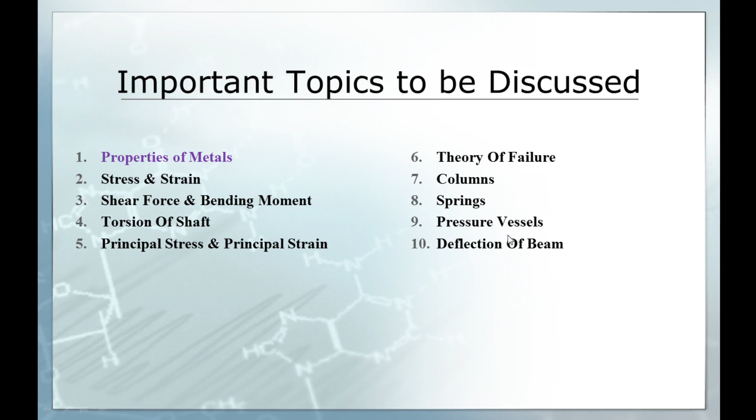In the metal properties, the first property is elasticity, which is very important to know for mechanical design engineers. The definition of elasticity is that it is the property by virtue of which a material deformed under the load is enabled to return to its original dimension when the load is removed.

When any specimen is loaded under tensile or compressive force, the material tends to deform to some extent within elastic limit, and when that load is removed, the specimen will regain its original shape and size.

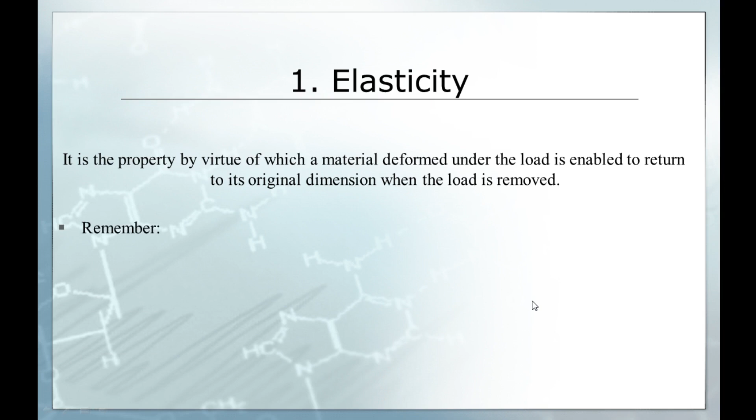There are few points to remember for elasticity. If a body regains completely its original shape, it is called a perfectly elastic body. Steel, aluminium, copper, concrete may be considered to be perfectly elastic within certain limit.

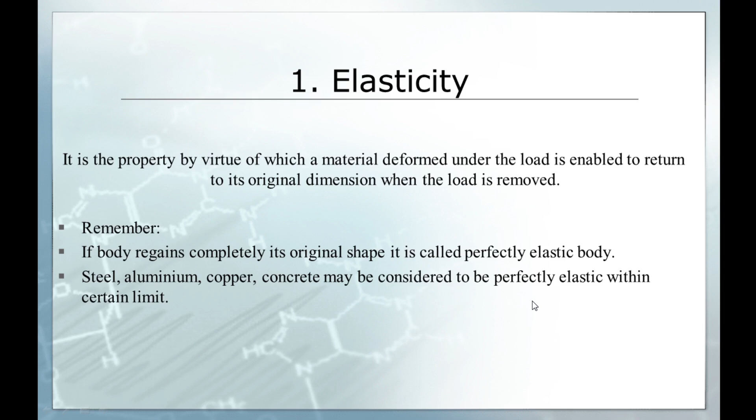The next metal property is plasticity. It is the property by virtue of which a material deformed under the load does not return to its original dimension when the load is removed.

First, we learned about elasticity. Later, this one is plasticity, which is different than elasticity; it comes after elasticity. In elasticity, the material, when load is removed, gains its original shape and size. But in the case of plasticity, when the load is removed from the test specimen, the material will not go to its original shape or dimension. It will be as it is when it is deformed.

In that condition, it will remain the same. There are few points to remember: this property, plasticity, is particularly useful in operation of pressing and forging applications.

So now you get it right. Plasticity is a very important property for mechanical engineers or mechanical industries. There are few parts which require to be produced by using these applications, which are pressing and forging applications.

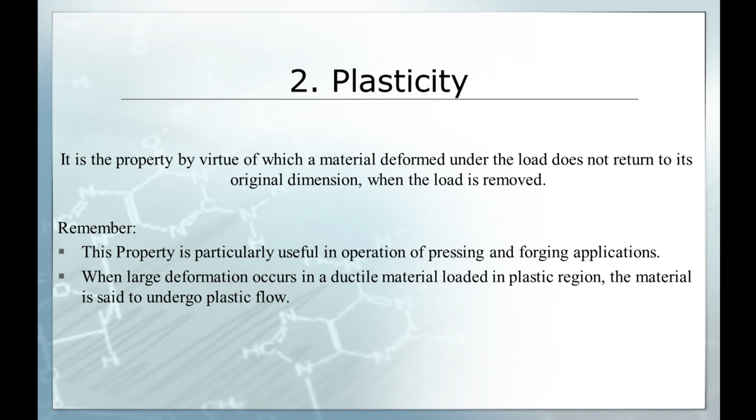The next point to remember is that when large deformation occurs in a ductile material loaded in the plastic region, the material is said to undergo plastic flow. I think you get it. Steel, aluminium, copper are few of the metals; these may be considered to be plastic beyond elastic limit.

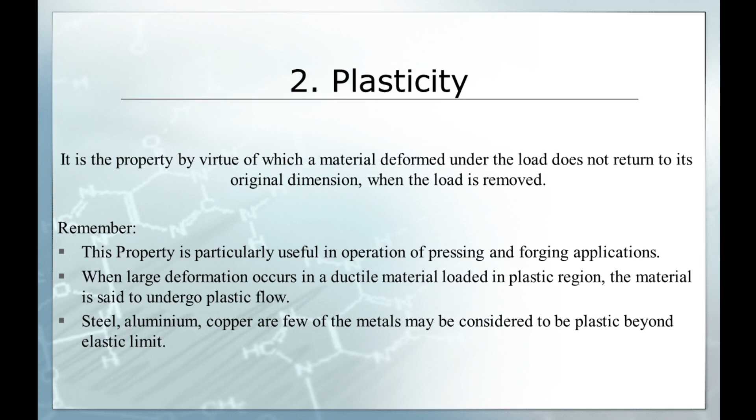Let's go to the next metal property, ductility. It is the property which permits a material to be drawn out longitudinally to a reduced section under the action of tensile force. There are few points to remember about this property.

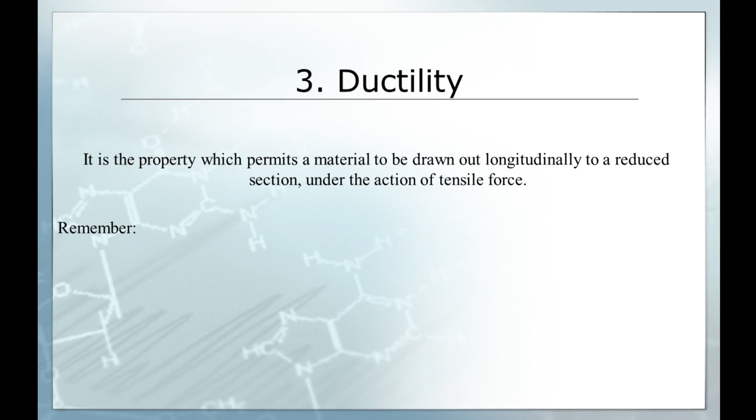Guys, ductility is a very important property for mechanical engineers or design engineers to consider. Ductile materials are materials which are also elastic and also have this plasticity property, and because of this property there are few applications we can use this property for.

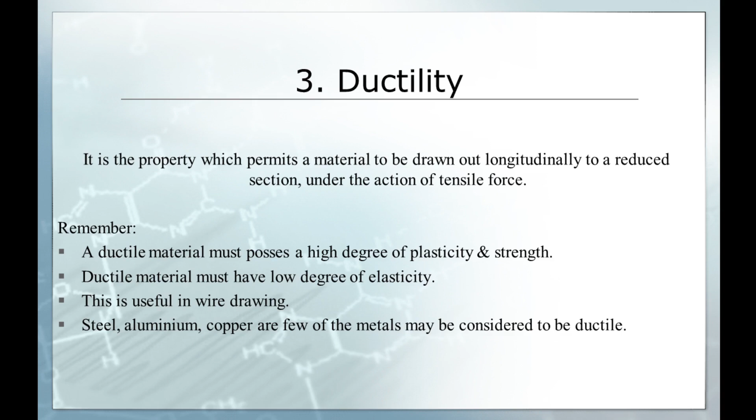Let's go to the next property, which is brittleness. It is exactly opposite of ductility; it is a lack of ductility. Brittleness implies that it cannot be drawn out by tension to a smaller section.

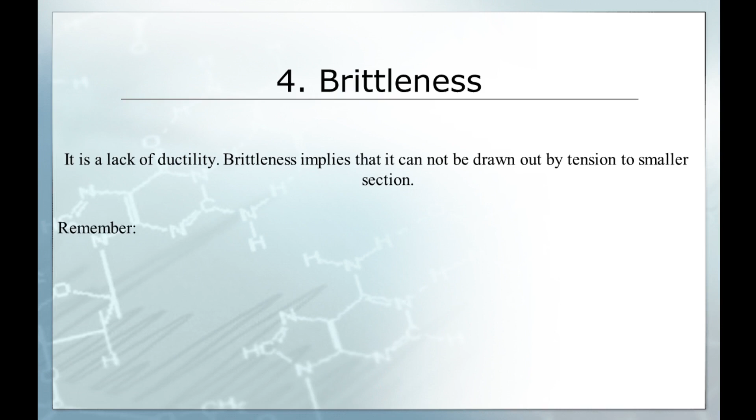There are few points to remember. In brittle material, failure takes place under load without significant deformation. So when the test specimen is loaded, and if we put some compressive or tensile stress or force to it, it will not elongate because it is not a ductile material.

It does not have elasticity or plasticity. So what will happen? There is no elongation, there is no deformation. So the specimen will break when the load goes beyond its strength. So this is the brittleness property.

Ordinary glass is nearly an ideal brittle material. Have you seen anywhere that when you apply load to glass, it elongates? No, never, it will not. It will break when the load is applied.

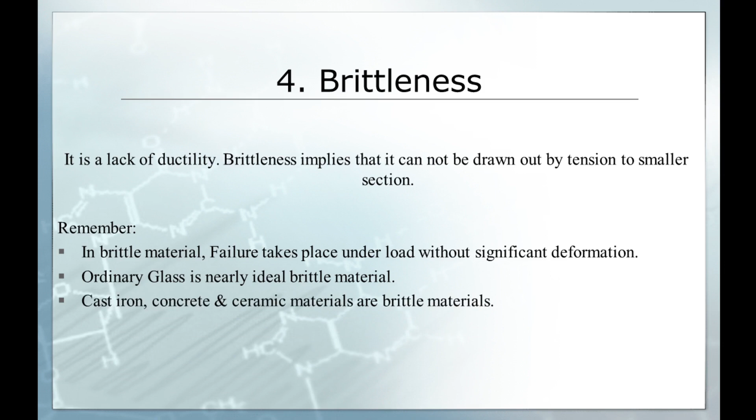Cast iron is also a brittle material. Concrete is a brittle material. Ceramic materials are also brittle materials. The next property is malleability.

It is the property of material which permits the material to be extended in all directions without rupture. We can say this property is similar to ductility.

Like in some cases, forging or any other application, if the specimen is hot to that temperature level, when you hammer on it, it will try to deform in all directions 360 degrees, but it will not break and it can gain another shape and another size.

The point to remember is a malleable material possesses a high degree of plasticity but not necessarily great strength. Okay, let's go ahead.

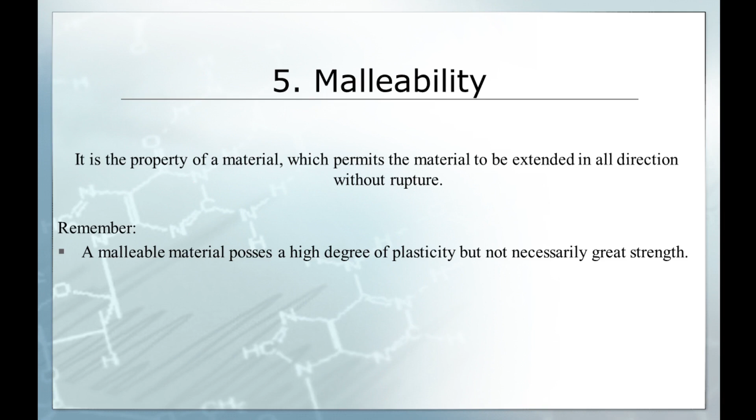Another property is toughness. It is the property of a material which enables it to absorb energy without fracture. Guys, toughness is a different property than strength. Toughness is different, strength is different.

The point to remember is that it is desirable in a material which is subjected to cyclic or shock loading. Any material, any component which is subjected to cyclic or shock loading - for example, your suspension springs - these are subjected to cyclic or shock loading. Therefore, this property, toughness, is very much required in springs. So while designing springs, please consider this property, toughness.

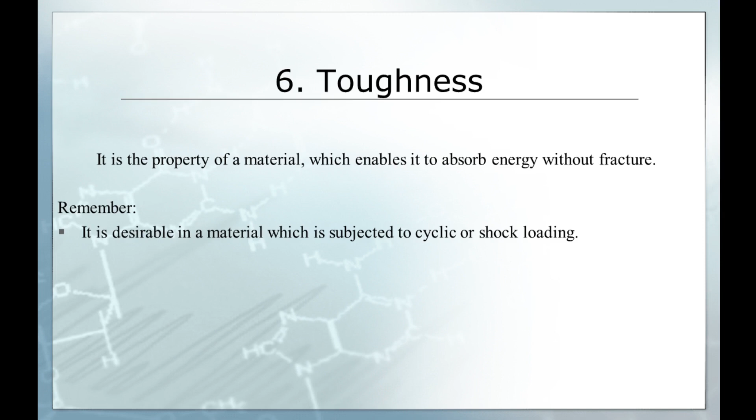The next property to discuss is hardness. It is the ability of material to resist indentation or surface abrasion. If a material is hard, it will not allow for wear and tear.

So it is the ability of material, but material does not have this ability from the start. We have to do some treatments on it to make the material as hard as possible. So there are a few points to remember. The hardness of the material is measured by a few units.

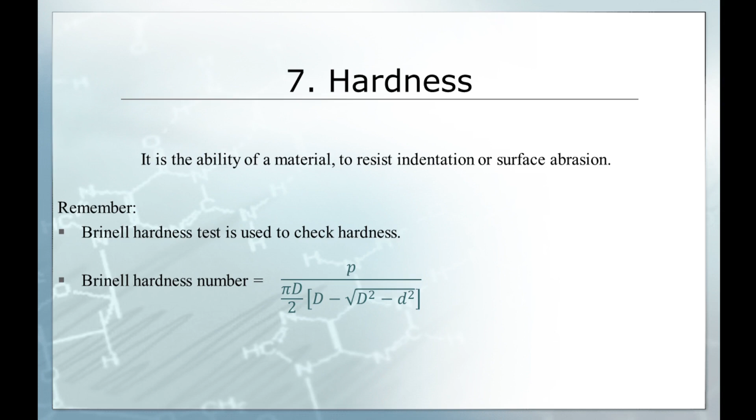There is one test called the Brinell hardness test, and there is another test called HRC. In the Brinell hardness test, this test is used for checking the hardness of the specimen, and this is the formula to check the Brinell hardness number: P divided by pi capital D divided by 2, in the bracket capital D minus under root capital D square minus small d square, bracket closed. By using this formula, we can find out the Brinell hardness number of the test specimen.

Here, capital P is the standard load. Capital D is the diameter of the steel ball in mm. Small d is the diameter of the indent in mm.

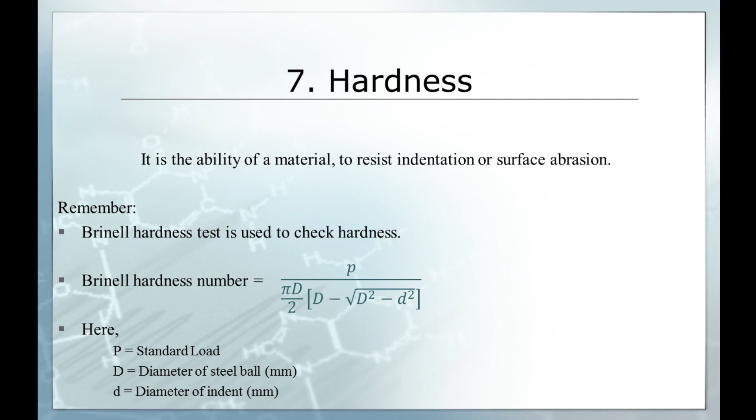The next property to discuss is strength. This property enables material to resist fracture under load. This is a very important property for mechanical or design engineers to consider while designing any component.

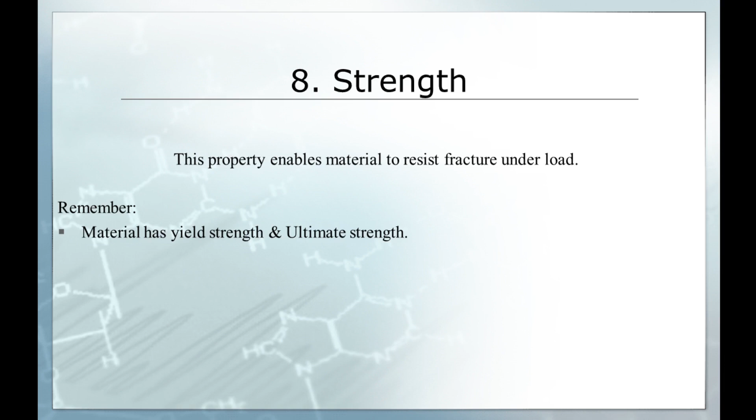Remember, every material has its yield strength capacity and ultimate strength capacity. While designing, you need to consider both these strengths. This is the most important property of a material from a design point of view. While designing, we must consider that stress is not exceeding the yield strength of the material, obviously with some factor of safety.

Suppose steel has a yield strength of about 5000 Newton. You are putting some load on the component and the tensile stress is coming to 2000 Newton. So if I consider 2000 Newton stress is coming due to some load, let's say a 500 kg load, and 2000 Newton stress is coming to that specimen, but it is having a yield strength of 5000 Newton, then it is safe. More than 2.5 factor of safety is considered.

This is how we go ahead while considering strength. But if the yield strength is 5000 Newton of that material, but your stress is coming to more than 5000 Newton, then obviously that material or component is going to break. It will not sustain. In that case, you will need to resize it, increase the size, provide some ribbings. This is how you are going to improve your design.